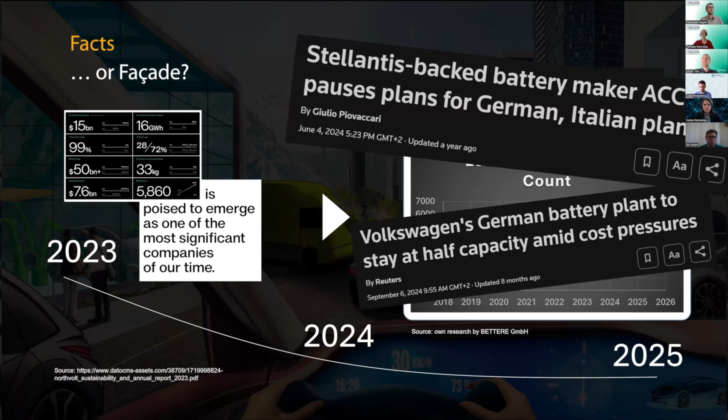So I set out on a mission to understand why Asian players are just pushing through with their 5-year plans, but companies in the EU and the EU itself are kind of running in circles at the moment and not having the feeling to really make huge progress. And we are on the mission to fulfill the requirements that we see in the battery passport, and I will pass those slides later on. The question is if even we European players will meet those requirements.

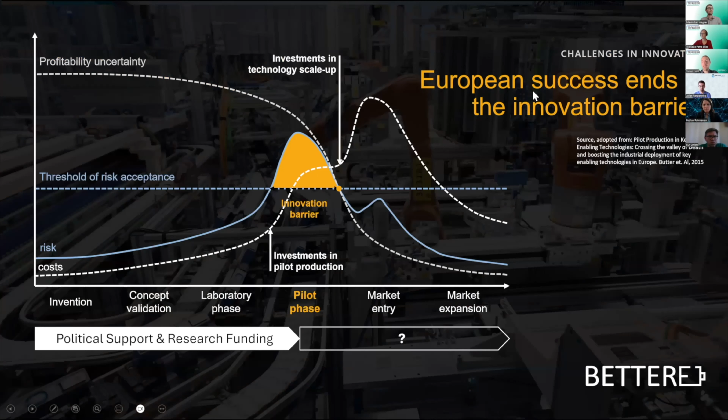So as I said, I wanted to find out, because I was not certain if I think we have the competences, but the question is, how do we push through this innovation pipeline? So besides the technology part, there are 2 other players involved, and that is the finance industry as well as the government. So I'm talking to 3 people on this tour: industry, finance, as well as politics.

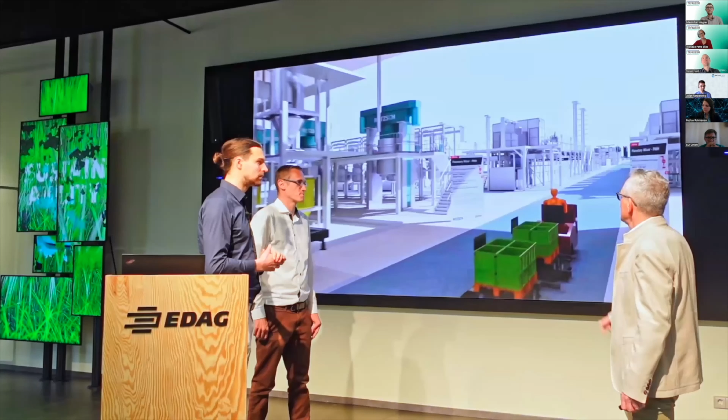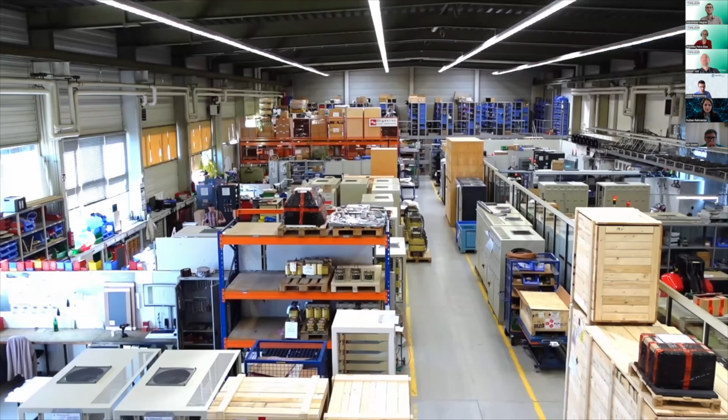I want to share some impressions of my tour with the following slides, and this is the video that gives you an impression. So I've traveled over 9,000 kilometers, almost reaching 10,000 kilometers right now, visited manufacturers, machine suppliers, quality inspection suppliers, charging infrastructure innovators, etc., to really make up my mind if those PowerPoints that we see at conferences are just talking or if they are really delivering value.

And what I have seen so far is that we do have the competence, I see it, but there's one big issue, and that is that we need to connect. And that is also the reason why I decided to continue my journey, visiting more people. This is just a picture of today from Custom Cells, just some impressions here. And to circle back, this is the reason why I also started collaborating with TraWeBa, because this networking aspect really needs to be brought to the next level in order to build the European battery ecosystem.

So yeah, if you have questions about this, I just gave some impressions. Of course, this is way too short to give you the whole extent of it. But then yeah, please state your questions in the following. So really short pitch, and I think I met the 4 minutes. Yes, you did, even with 40 seconds to spare.

Okay, so we can keep that for some remaining words. Some findings, what I think, how we can break this innovation barrier that is lying over us right now. I think we need to talk about regulations. We need to build trust, to talk to investors, very importantly, to focus more on the technological part of the process itself, because battery manufacturing is really complex and we need really shop floor expertise, and I think that is to some extent still missing. Today I saw a lot of expertise and this gives me hope. So yeah, I'm open to questions, and let's collaborate together to bring this industry to life.

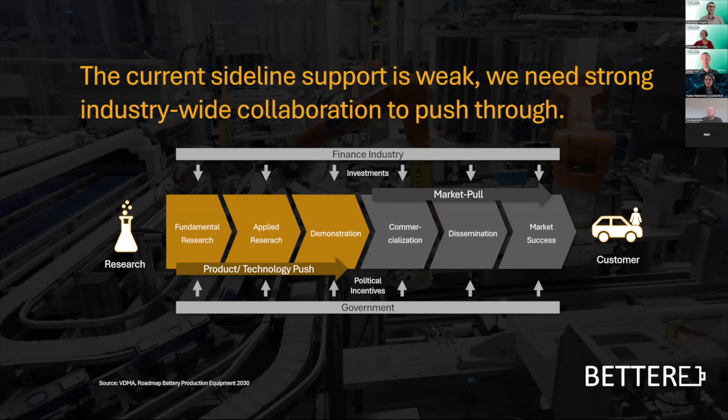So I will introduce myself shortly and my company. My name is Lukas. I'm in the battery field for more than 10 years now. Started my battery career at BMW, planning module and pack lines in the States, in China, in Germany, and in various cities in Europe. Left the company in 2021, founded myself as an entrepreneur, and then founded the Limited Lab, a German LLC form. What we do is we are called like consultants, but we are operative partners. We partner with the project leaders, top management, and the operative level in getting the projects up and running. If a gigafactory is going to bust, or if the projects don't go quite fine, we are the ones that get called, and we go on site and try to get it fixed.

And we did more than 50 big lines in total. If we combine every little strategic project and baby technology review, it's more than 70 in total for more than 45 customers. Those are the OEMs, the tier ones, tier twos, down to the component manufacturers, the equipment manufacturers, and more. Those are our customers.

But I would like to get to the content. So how to really be successful? Of course, 4 minutes are quite short, but what to do?

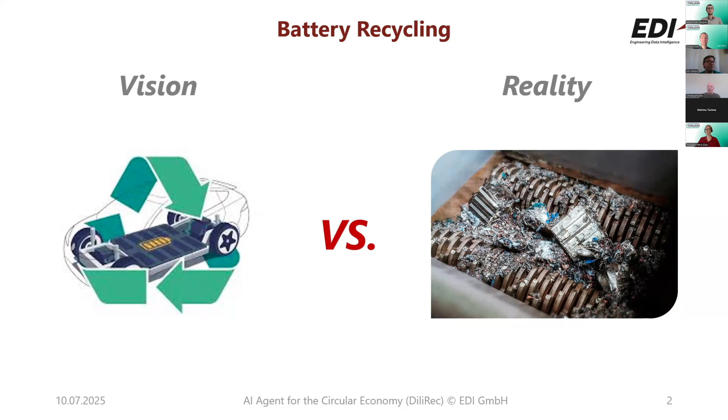I will say there are also a lot of processes really - we have to establish these processes, and here we also have to use different kinds of solutions.

One other thing - I think all of you know about the battery pass, the digital product pass, as it's called in general. I think that's a really important thing, that we get as much information as possible. But also what I can say is, for different steps in the life cycle, that could be usage, it could be in the workshop.

If you go to the workshop and you want to repair the car, or you want to recycle it or reuse the material, you need different kinds of information. So that is what I want to say: there is no one battery pass with all information. That is a dream maybe, but it will not happen.

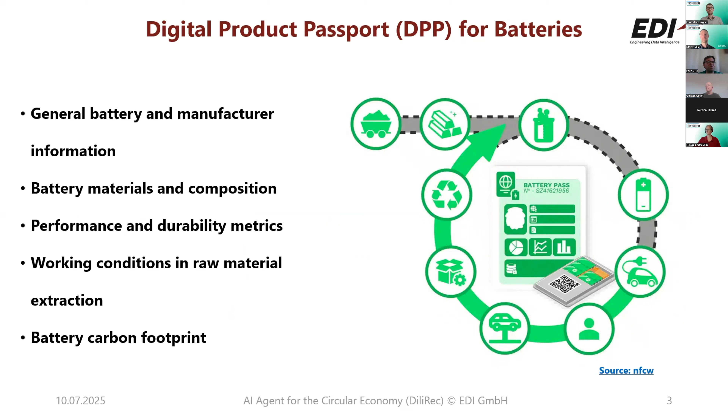But also what I can say is the battery pass could be a good starting point, and that is exactly what EDI is doing in this DiliRec project.

This is a view of our digital twin, which we established especially for this recycling process. From EDI's perspective, we always provide this kind of AI-based hybrid model - that means we include also the expert knowledge, which is also here in Germany already available. So many institutes, Fraunhofer IKTS, which is also involved in this project, make a lot of nice research work on these battery topics. So this is always a combination of algorithm and knowledge.

A starting point, as I mentioned, is you have the battery pass, you have some information, but in a specific process, for example this LFP recycling process, you need additional information about the battery - you need some information about the jelly roll.

You need detailed chemistry information. There you can use camera techniques, other sensors, and we're doing sensor fusion so you get a holistic view. During the process steps we can provide different specific information which can also be transferred to different players. So not everything has to be in one factory - you can transfer the information. That's the idea of this product pass, that information can be easily shared.

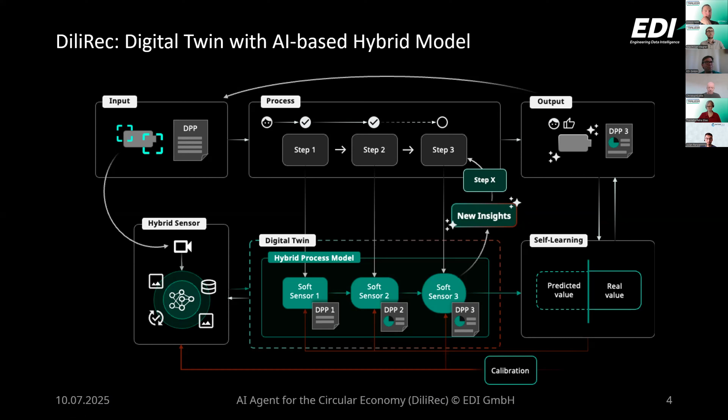And what we're also providing is a kind of self-learning approach. With EAS batteries, we really want to reuse the material in the battery for new production. Our target parameter is that we reach the defined quality for new batteries with the recycled material. So that's roughly what we're doing.

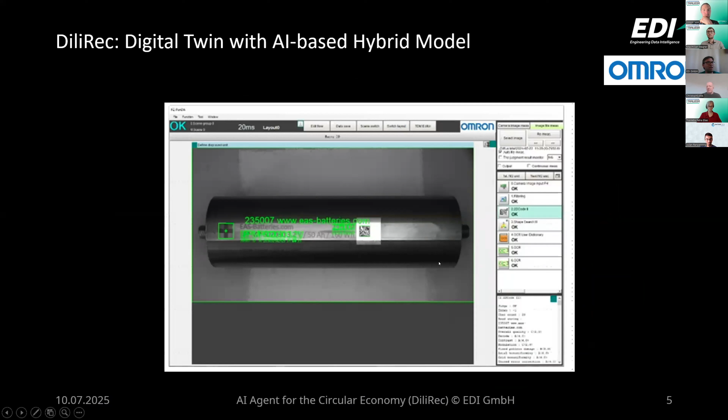For example, Omron is also involved in this project where we have digital twin solutions with image recognition for the cells to get this information. That was my pitch. If you're interested, we have a deep dive in a few weeks where we go more in detail on how we're using the AI solutions.

Thank you very much. Is there a question from the audience up front? You just mentioned it on your last slide - are you already working together with Omron as your customer or partner in this?

Omron is a partner for automation, also for this recycling process.

Are there already customers or partners in the recycling space you can name, to more practically explain how you integrate your solution in their daily operations? As I mentioned, the daughter of Remondis, BLC, is also involved, and they have this kind of recycling line, but especially for LFP it's the aim of this project to go until the jelly roll, so we disassemble the jelly roll and separate the material in a manual way, so we have different approaches to get out the active material.

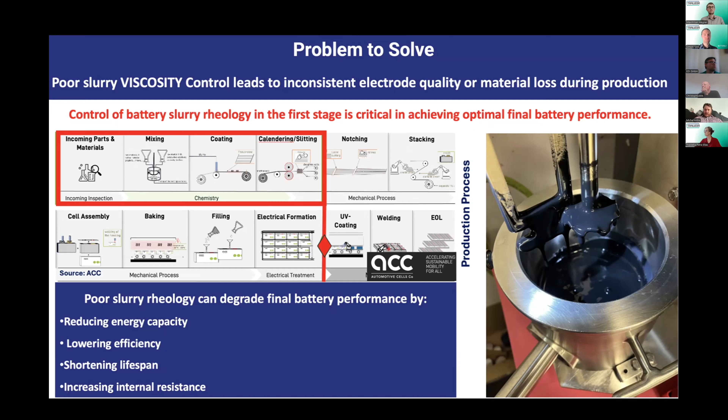The problem we solve for the battery industry is that when you have poor slurry viscosity control, that leads to inconsistent electrode quality or material loss during production. Since battery slurry mixing is one of the first stages, it's quite critical - getting this step right the first time is crucial because of the run-off effect on the rest of the production process. If you have poor slurry rheology, it can degrade final battery performance - reducing energy capacity, lowering overall efficiency, shortening lifespan, or increasing internal resistance of the battery.

How they measure the viscosity, since it's such an important parameter to control, it's actually quite crazy to think about it, but today they still use offline viscosity measurement tools to take samples from the process and do analysis, and then come back and do adjustments to the process. Drawbacks with offline techniques, there's numerous, but here's just to list a few of them.

So you're not measuring in the actual process. So when you take the sample away, you have some effects that can happen afterwards with the sample, because it's different to what's actually running in the process.

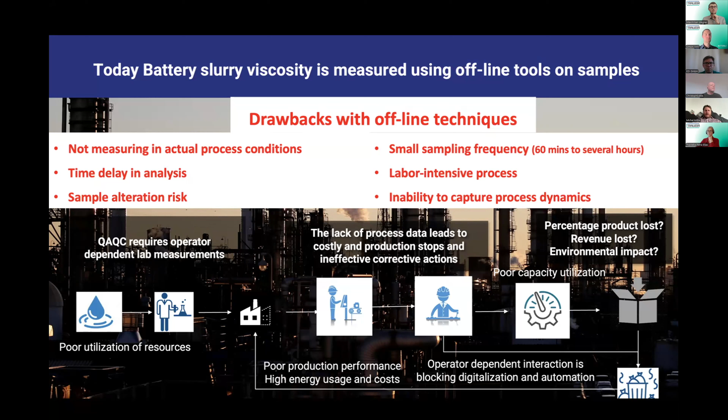The sampling frequency is very small, so it can be every 60 minutes, 30 minutes, or even several hours. You have time delay on your analysis, that takes time, so it's also labor intensive. And all these effects have a run-off effect where it increases cost, time, and of course, making your decision-making a lot slower.

And of course, if you can catch the deviations earlier, you can make better adjustments and have better control on your process. And the Incipientus solution, we provide an inline process rheometer, which is continuously monitoring the rheology during the mixing process or during production.

So the benefits of this system is you're actually measuring on the actual process conditions. So what's going in your tube while it's flowing, you have immediate feedback. This will lead to, of course, better consistency and uniformity in the final product.

When you can optimize your ingredients usage, because you have feedback in real time, it can lead to reduced waste and increased efficiency. And then you have better final battery performance.

Just to give some information on the technology, it's based off medical ultrasound, the same technique that's used to see inside the human body. So we took that technology and applied it to the process industry, so we can visualize the flow through the tube. And we're not in contact with the slurry at all.

So it's non-invasive, and it's pigging friendly. And of course, after many years of research, we can use these images to get the consistency or the viscosity of the product. It's applicable to food products, sauces, cosmetics, anything that's flowing in liquid form.

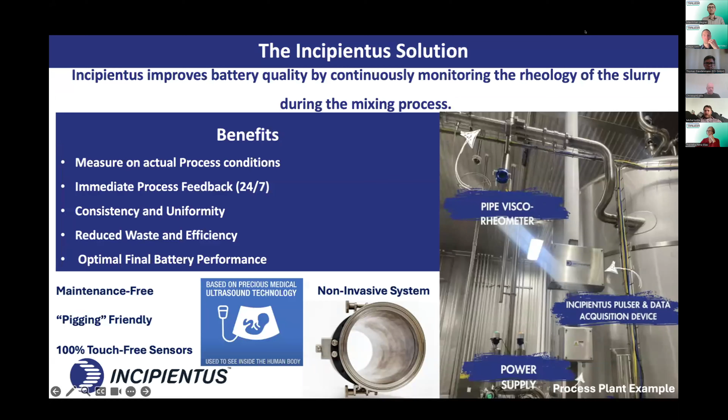And on the right-hand side, I've put a nice example of an installation in a factory, how it typically will look like. And that's it. Thank you.

Perfect. Thank you. And perfectly on time as well. Thank you very much, I felt like I was rushing a bit. Chris, is there already a question from the audience?

Otherwise, Michael, maybe you could, we talked already about the gigafactories in Europe, maybe you can shortly comment, because I see there's already the first question from the audience, but maybe you can comment shortly on how difficult and important is the upscaling process for slurries?

Yeah, I mean, I'm not a battery expert, so I'm going to be honest, we provide the instrumentation. But after speaking to numerous clients that we're currently working with, some of them are in the gigafactory world, it is quite a critical component to have your viscosity right and in real time to increase efficiency and overall quality in the end product.

Yeah. Perfect. Then, Luca, just unmute yourself and you can ask. Yes. Yeah, thank you very much.

It's very cool that you're trying to optimize the first step, or one of the first steps. And my question would be, it's cool that you can measure it online and in real time, but do you also provide a recommendation or active parameter adjustment in order to reach optimal slurry parameters, or is it something that is left up to the producer still?

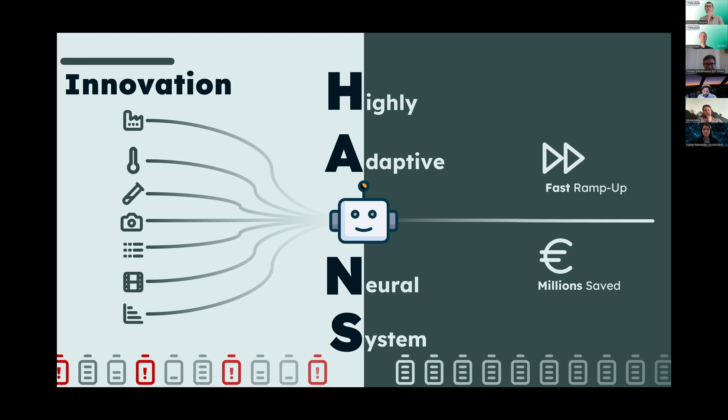How does it do it? By unifying multimodal data, it can work with images, sensor data, machine logs, and videos, combining them all into one uniform AI orchestrator. The result: hopefully fewer bad batteries, meaning faster optimization, waste reduction, and saving hundreds of millions.

What truly sets us apart is that our product is designed by and for battery experts. It's not just another generic solution. Every decision engine inside HANS is trained to reason with specific battery domain knowledge. It's multimodal, understands all the complex interactions in production, and supports process engineers to find clarity. That's why it works.

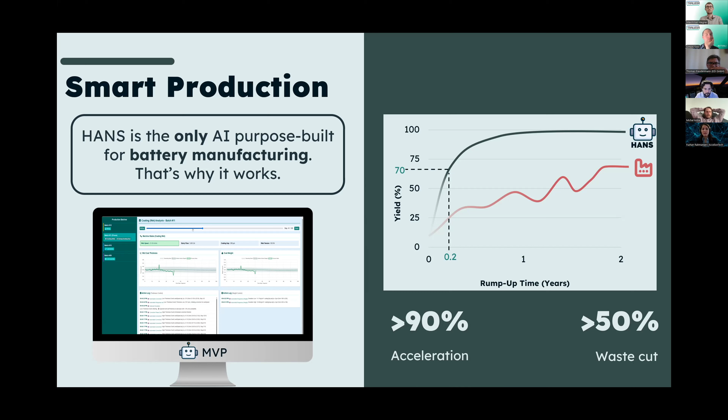The market is already $20 billion and set to double by 2030. Battery factories cannot afford to fly blind anymore. We plan to roll out HANS as a B2B SaaS, what we call HANS as a Service, with a setup fee, recurring license, and a retainer, enabling battery manufacturers to stay flexible across future constellations of chemistry and production processes.

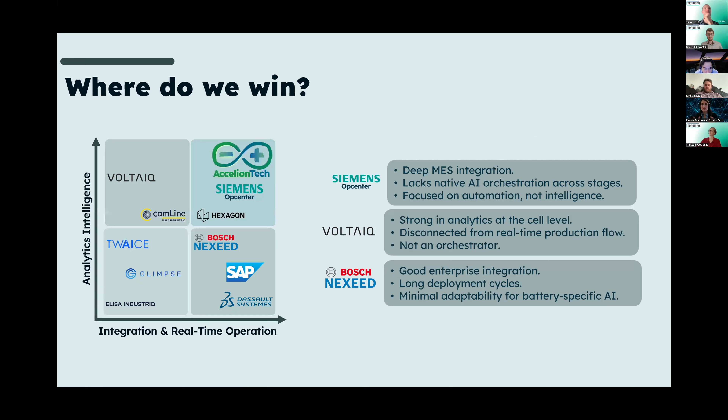We reached out to more than 50 industry experts, and they expressed a clear need to have AI in their production. Current battery software has players in monitoring, controlling, and analytics, and our mission is to connect and enhance. We have one single goal: make Europe a battery leader.

Our team is Lukas, who has a lot of experience building scalable software; Sebastian, with a strong background in AI and physics; and me, Fuzhan, complementing the team as an AI and battery researcher. We are an early stage startup with ambitious goals, and right now we are focusing on validating our product. If you want to see what HANS can deliver, this is the moment to collaborate. Let's talk together and make Europe's battery factories intelligent and profitable.

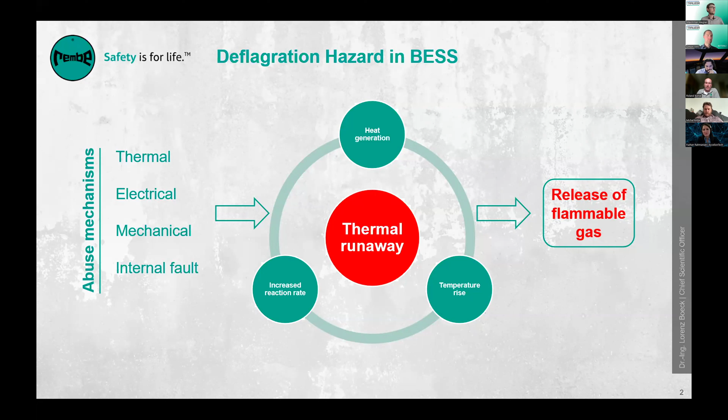That will happen if we see a thermal runaway. Of course, we have a great release of flammable gases coming out of the chemicals inside, and these flammable gases tend to explode if they reach a concentration forming an explosive mixture, and if they're in a confined space. This concentration will increase in the case of multiple destroyed cells, which is an effect of the thermal runaway.

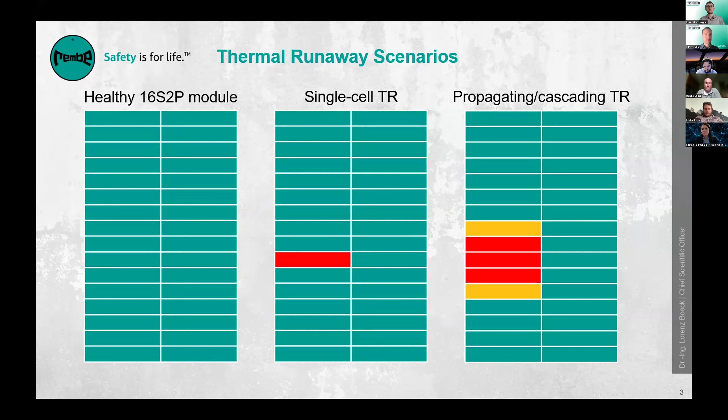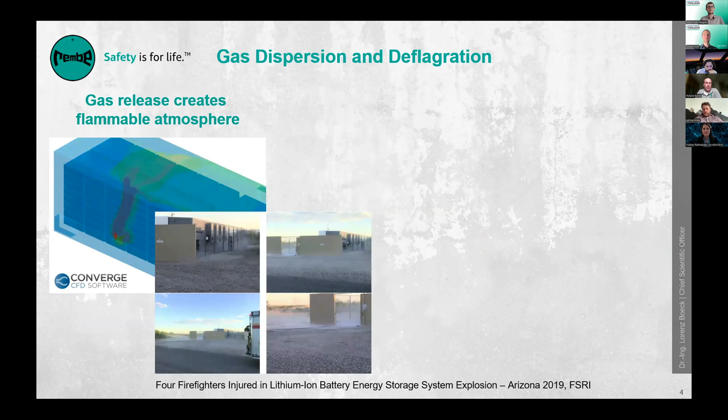So without going into too much detail, imagine a container installation, for example—if thermal runaway starts, you get a certain release of gases and explosive mixtures, and the result has been seen many times around the world.

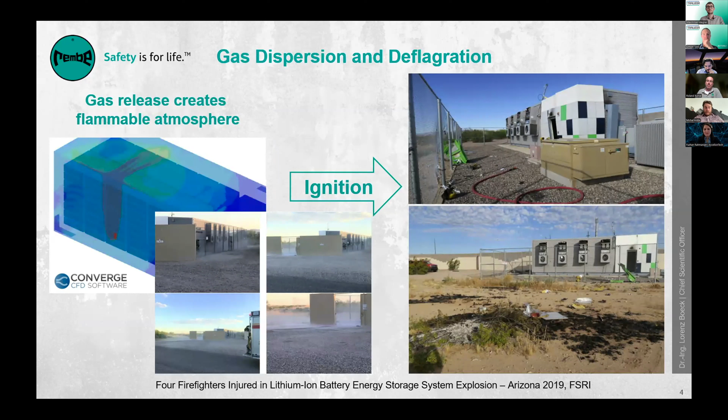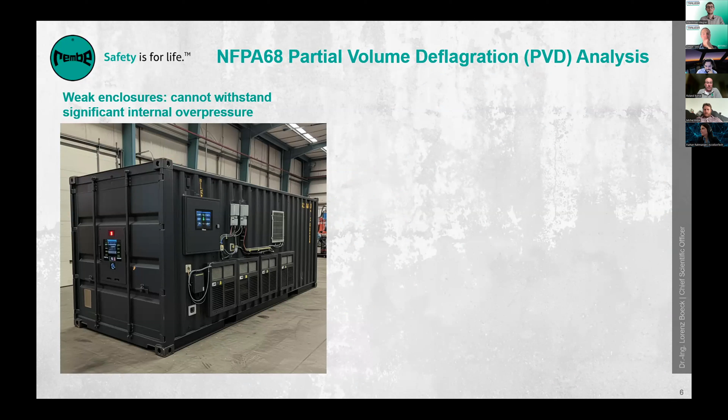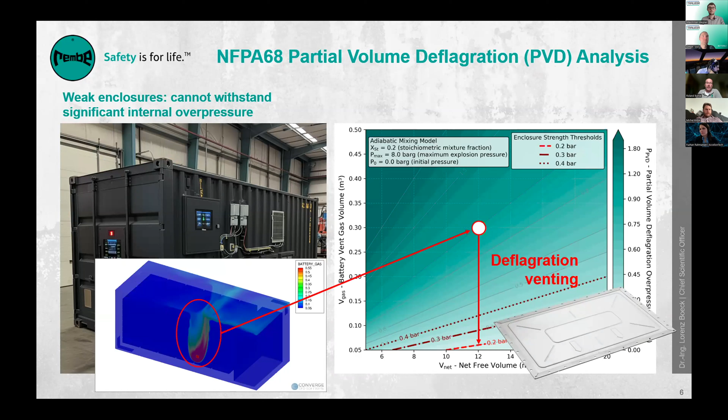Such container solutions had big malfunctions, big explosions, destroying the structure and rupturing by pressure. These quite weak pressure-resistant housings are dangerous for people walking around or being near them. For that reason, we look for a solution to release the pressure, which will occur significantly after a deflagration. So-called explosion vents will be installed on the housing of such storage systems, and they release the pressure to the outside in a safe way.

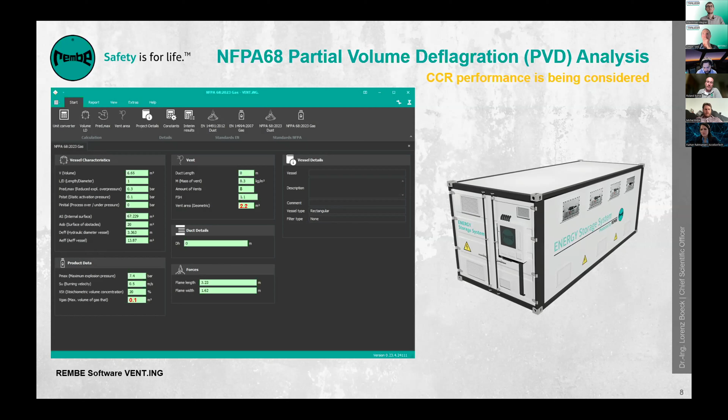We have developed different concepts to size these so-called explosion vents, for example on container solutions. We are supported by explosion standards available at the moment, because we are facing nothing else than a gas explosion. The systematic is called gas explosion venting. Several surroundings and setups can be considered, therefore different results will occur, meaning you install more explosion vents or less. In some cases, these also need to be installed on the side because you're stacking containers one over the other, so you have a so-called side venting.

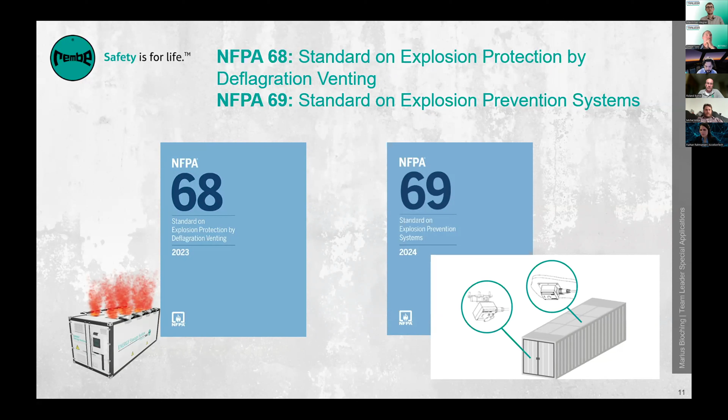So what is the option, or what is the physics behind it? If we follow UL9540A, we have to analyze what is coming out of a cell because of its chemistry. When we know the explosive gas-air mixtures, we can do the sizing for these explosion vents according to other standards like NFPA 68, which has a lot of equations behind it to size it. On the other hand, we go the road down and do explosion prevention. So if we're measuring an uncomfortable amount of gases, we can switch down cooling systems and try to prevent more gases from being evaporated. But this is prevention, and this is constructive explosion protection.

So what are the findings that we saw during the many tests we have done on such systems? I have a short video. Of course, it's time consuming, but it explains quite a lot.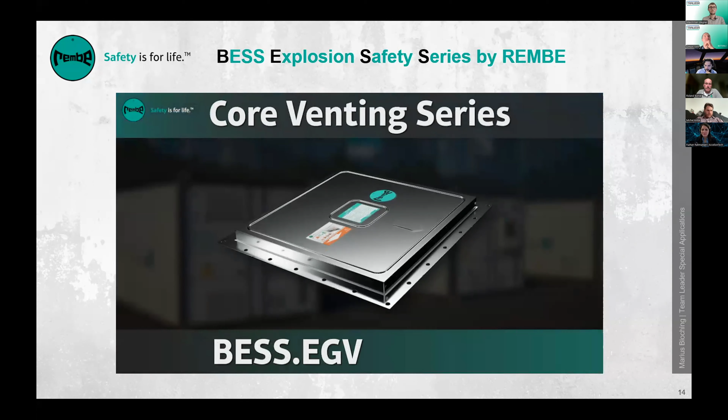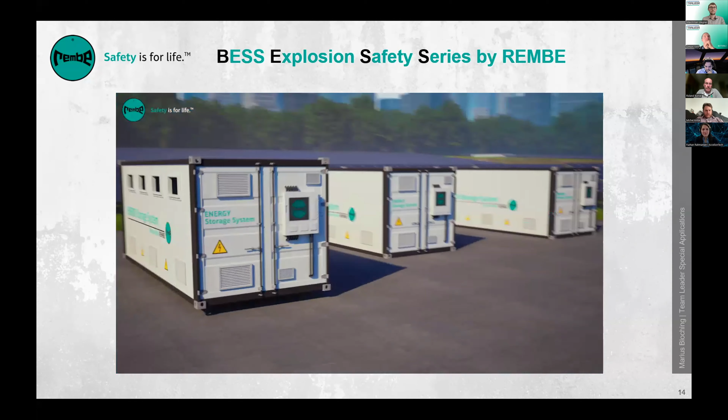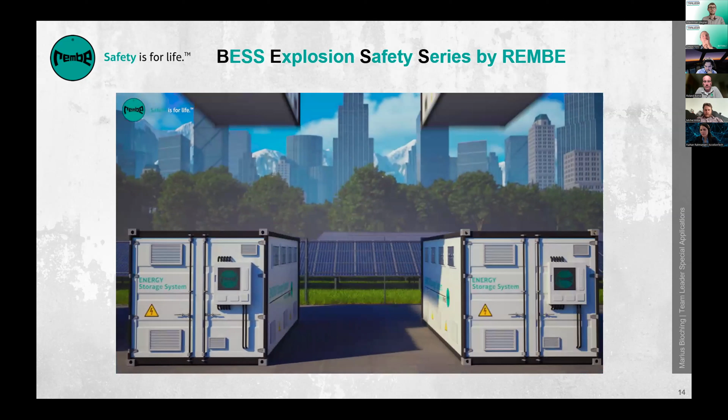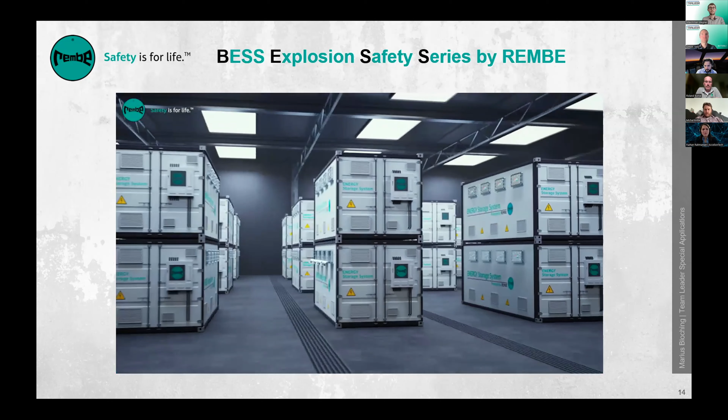Explosion protection. Today, we're bringing this expertise to battery energy storage. Three product series uniquely engineered for modern BESS applications. The BESS Core Venting series sets the foundation - a standard solution for outside application, just venting the container, to match your BESS design. Experience breakthrough innovation with our BESS Smart Venting series. The integrated Targo vent principle safely redirects the force of explosions upward, directing the explosion to the sky so people walking around avoid injuries, meeting the needs of space-efficient, stacked BESS installations. REMBE presents the BESS Premium Venting Series with BESS Q-Vent. This advanced flameless technology eliminates external flames while minimizing pressure and temperature effects, making indoor installations safer than ever before. Partner with REMBE, advancing BESS safety together.

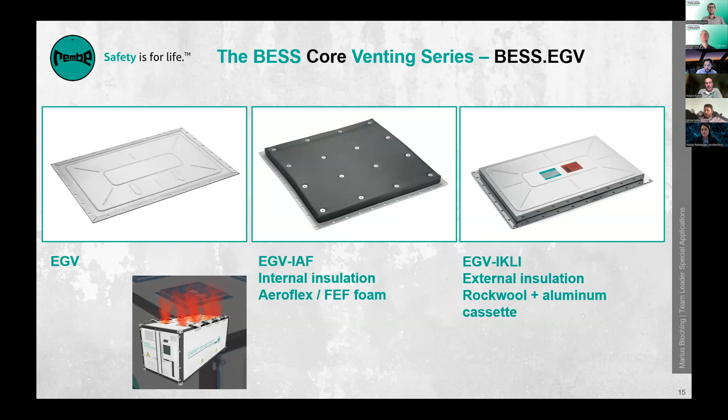Okay, so you see here different solutions, which I can explain later on in the discussion. So you need different technologies. If you see here what is coming out of a container during the explosion venting process, you see a quite long flame duration, even if this is an explosion. And of course, this is not possible doing inside a building.

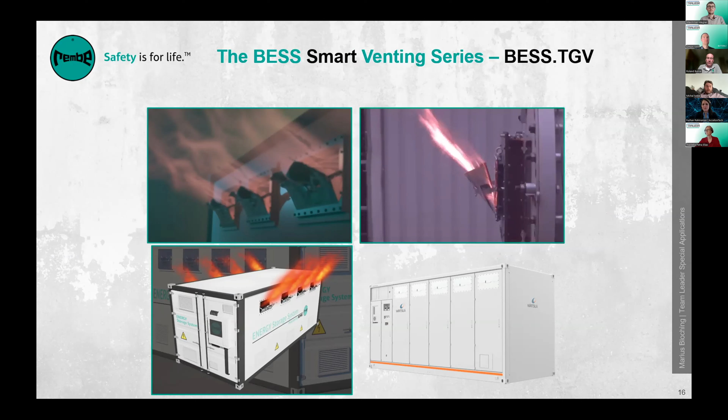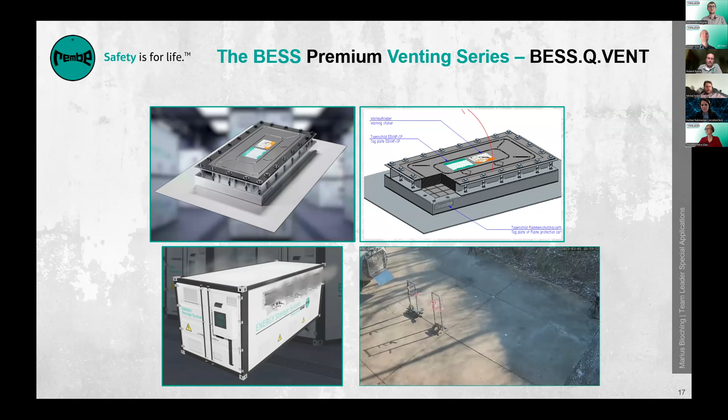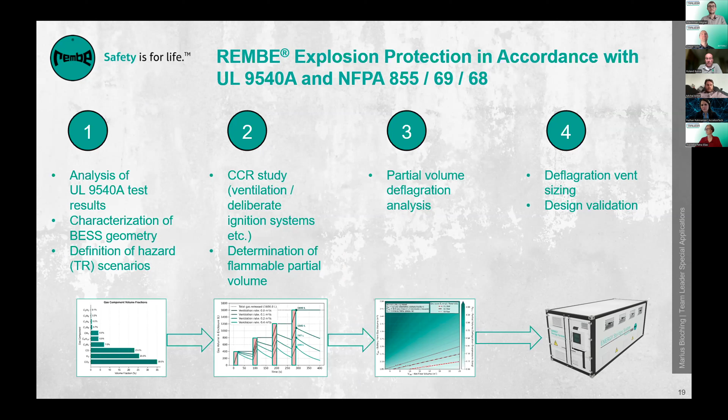For that reason, we have a so-called flame arrestor element, which is installed underneath the explosion vent. Then the explosion will be quenched and you see no flame coming out, and even in the nearer surrounding, no dangerous effects happen. So that's our solution, and I just jumped through it. So we have 4 steps: analyzing the chemistry, doing the study, doing the calculation for the vent, and installing it. So, and that's all. Okay, that was quick.

Perfect. Yes, I knew he informed me that he had 19 slides. So yeah, I jumped through, so maybe I could shorten it in the discussion then a little bit. Yes, and we are almost reaching our 1-hour goal for this event, but I think a quick question to Roland is still possible.

And maybe from my side, just really quickly, how often will this venting be needed? Do you have some numbers on that? We see about 8 to 10 events per year where really strong thermal runaways happen. You can see this on different platforms all around the world. And if you do not do proper venting, you destroy the unit, and this leads to very long downtimes for the entire energy storage systems. So it's not seldom, it's regular, I would call it.

10 events counted for how many battery storage systems? All around the world, it's a lot. So it's not that it happens every time or around the corner, but when it happens, it has a very strong impact on the large field installations. Yeah, so we...